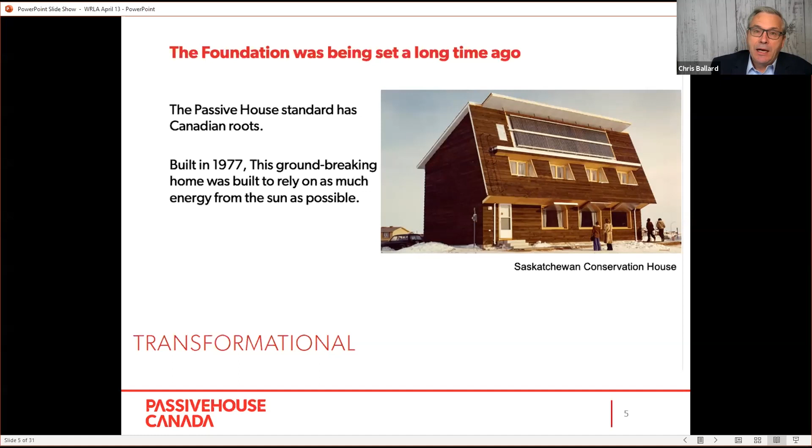Still has a family living in it, still performing to the standard it was designed to. Europeans came along and looked at this house and a number of others in cold climates and said there's a lot to learn. They took the data home, the design and ideas behind it back to Europe, they codified it, and today we have the Passive House Institute building standard, recognized globally as the best way to high performance or net zero buildings.

So we're called Passive House, but we are more than houses. We are a commercial space, institutional space, as well as houses.

Mark, have we got the slides back? If you're not seeing them, maybe Jess could chime in. Is it just Chris that's not seeing the slides? I believe it's just Chris. Okay, good. That's not my fault then. No, it's my fault. Give me one second here. Well, everybody that works in construction knows one of the first things you learn as an apprentice is to have a scapegoat. As long as we've figured that out, we're good. Can we scapegoat the technology? Look at that. Sure, it really isn't - I can't see it, I'll start and stop it again, and it might pop up on your screen again. That would be great, because it was there for the longest time.

There we are, there's our mission. Our mission has three things we focus on. We're here to make zero emission buildings known and adopted by government, industry, and the public. We support government and industry in the transition to high performance, zero emission buildings. And finally, we're advocates for the Passive House Institute building standard because it is globally recognized as the best and fastest way to get to near zero when it comes to building standards.

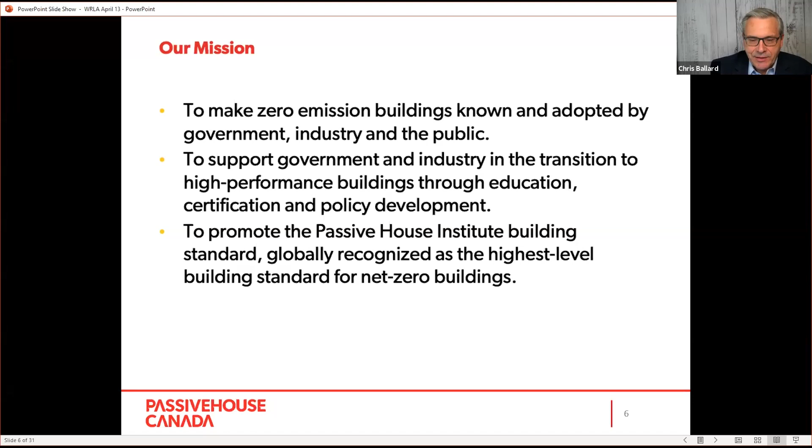So I'm at a bit of a disadvantage, Mark, in that I can't see the slide, so I'm not sure what's up next. And it's back again - I'm just closing down absolutely everything on my desktop to make sure that you're the only thing that's here.

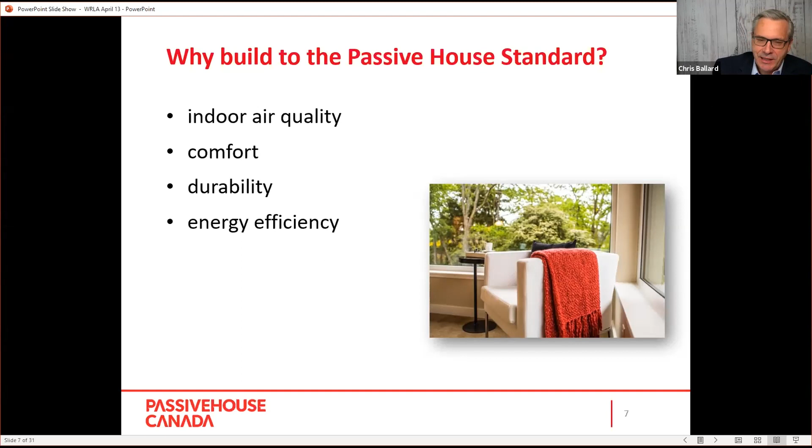So why build to the Passive House standard? Well, there's a number of reasons. First of all, passive buildings have exceptionally good air quality - Mark will get into this a bit later. They're very comfortable places to live in and work in, with really good thermal warmth and durability. There's a quality assurance that comes with building to Passive House standard - in order to be certified, you have to meet a very high standard. And of course, they are super energy efficient - designers often say it takes you and your dog to heat your house, and that's about it. On top of mind for many of us these days is GHG reductions - if you're not burning fossil fuels to heat your house, you're helping with GHG reductions. And overall, there's quite a cost savings when you move to a Passive House style of building.

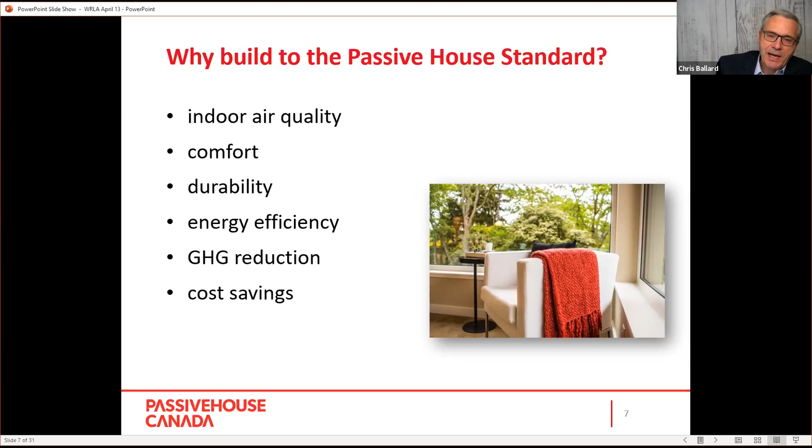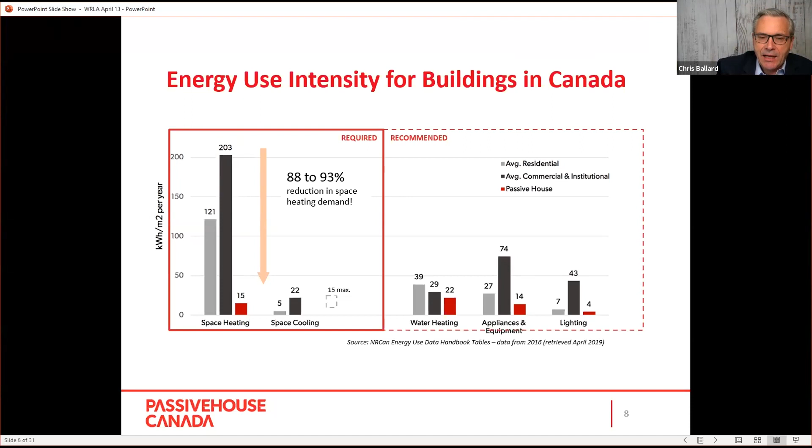So next, why are we doing this? The big focus these days is on energy efficiency. Here's a simple chart from the federal government through NRCan about energy use intensity for buildings in Canada. If you look at the red square that has 15, you're looking at about an 88 to 93% reduction in space heating demand when you move from code built buildings to a Passive House style building. Our country and countries around the world are going toward reducing energy consumption, and getting down close to that 15 is more attainable using the Passive House style of building than continuing with current code. So we know where we're going, and we know where the world is going.

Passive House is perhaps the easiest way to get us all there.

Going back many years, every province and territory in Canada signed on to the Pan-Canadian Framework on Clean Growth and Climate Change. That's literally every province and territory, and it's a roadmap to zero emission buildings. By 2050, every building in Canada will be zero emission, and in essence they'll be passive houses by then. We need to make new buildings more energy efficient, and we're adopting increasingly stringent model building codes, adopting that net zero energy ready model by 2030. So by 2050 it will be in place, but by 2030 we'll have that model.

Some provinces even sooner. So the federal government and all the provinces and territories are working on a harmonized national building standard. This is the proposed national code that will guide everyone to net zero ready by 2030 and net zero by 2050. Seems like a long way away, but it's really not. It's just around the corner. We have to get ready to get there.

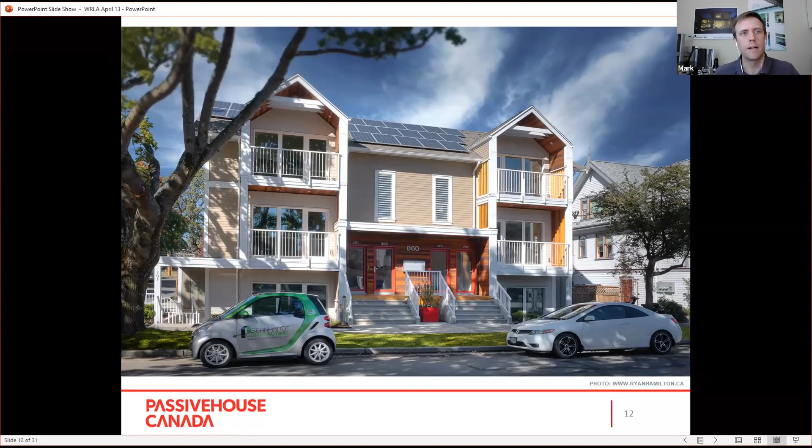Inside, it's the same thing. We're not compromising finish, we're not compromising design, all sorts of things like that. Inside, it looks like a regular house. For most people that walk into a house like this, I spend much more time talking about the paint colors than I do the insulation in the walls, which actually kind of annoys me. And that's why I spend most of my time helping other builders build passive house, so they can talk about paint colors and I can talk about insulation and things like that.

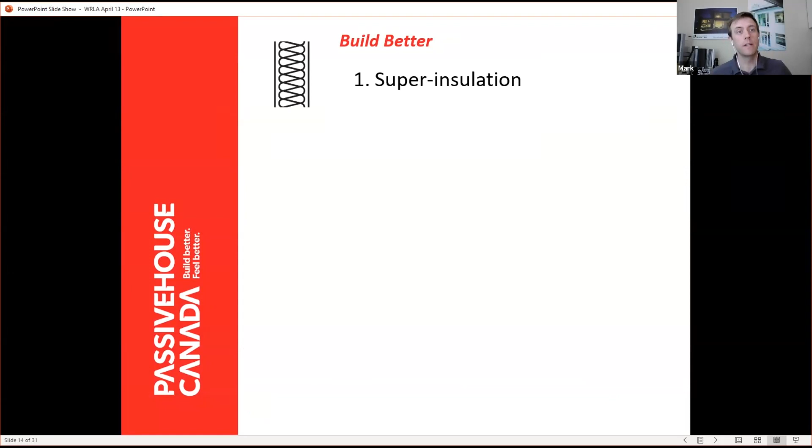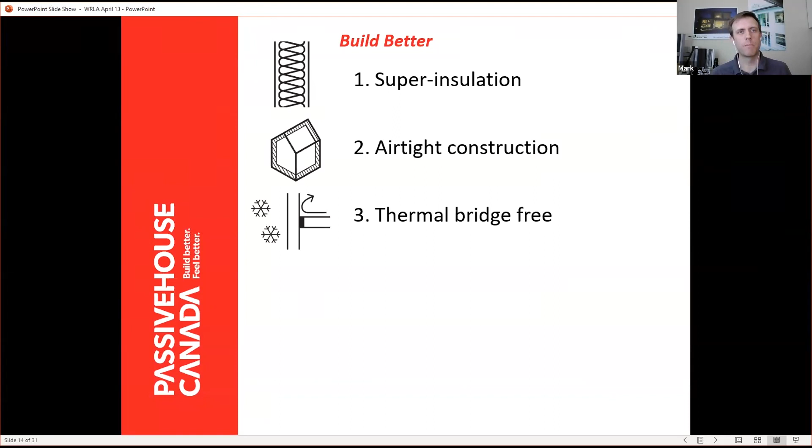So when we talk about build better, what do we mean? We mean super insulation, usually a significant amount more than what we'd traditionally see in a code-built house. We talk about airtight construction - if you're leaking air, you're also leaking heat and moisture through your envelope, so that's a potential durability issue. We're talking about thermal bridge free - traditional construction quite often will have steel beams coming through the insulated envelope, which creates a space where mold can grow, in places we generally find that undesirable. We're using higher quality windows and doors.

Quite often these would be triple pane, with different coatings depending on the situation. And we're not necessarily orienting all the windows to the south - in fact, in a lot of our projects we're not doing that. We're doing maybe even sometimes the opposite. What we're doing is taking advantage of the sun where we need it, using nature with what it provides rather than trying to fight nature with air conditioning and things like that.

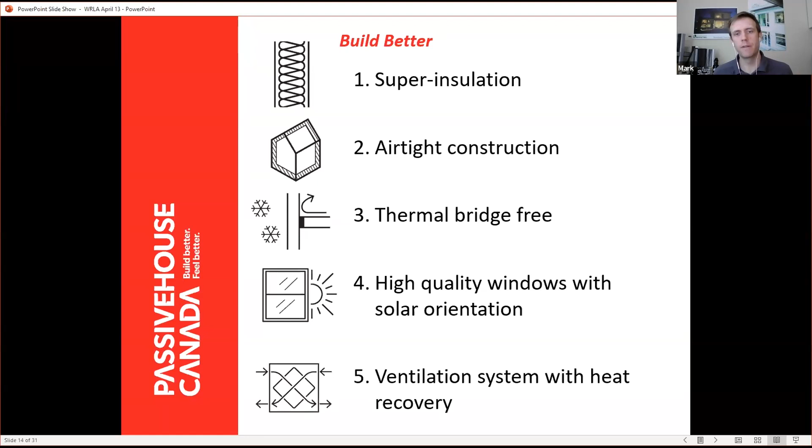And we're having a very good ventilation strategy. When we airtight a building, we need to get fresh air into that building somehow, but we want that to be managed and controlled, and we don't want to waste energy while doing it. So a very good ventilation system, which also provides very good filtered air inside. And that results in these kind of side benefits a lot of times.

We talk about energy efficiency all the time, and as energy nerds and engineering types, we'll often focus on the energy. But the real benefits, I think, are this feeling better. When I talk to a client about one of these houses, I talk about feeling better. I talk about my quality of life. I talk about how I'm not in energy poverty, and things like that. I don't necessarily talk about my energy bills.

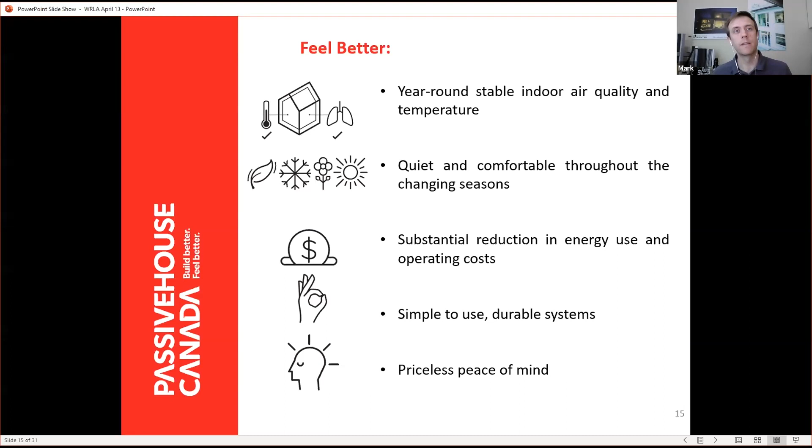And that was actually a lesson we learned early on in the marketing of this - that very few of our clients actually cared what their energy bills were. It's about that quality of life and that health and comfort that comes as a byproduct of chasing that energy efficiency.

So what it is in technical terms, the Passive House Institute, the one based in Darmstadt, defines Passive House with a few different things. The simplistic definition is that it cannot use more than 15 kilowatt hours of heat per meter squared. If you're looking at some codes and standards, you'll see similar numbers, though Passive House is measured a bit more strictly, so they're not quite equivalent. The idea is this is how hard your furnace has to work to keep the house warm, and that puts a limit on it.

When we put that strict limit on it, it forces us to look at other options for heating and keeping the heat, or the very limited amount of heat, that we already have.

The primary energy is another way of saying source energy. You might have heard that before, where this is the energy generated at the power generation station, plus all the transmission losses to your house. They calculate all of the energy that this house actually uses for its operation, and that, again, is pretty strict.

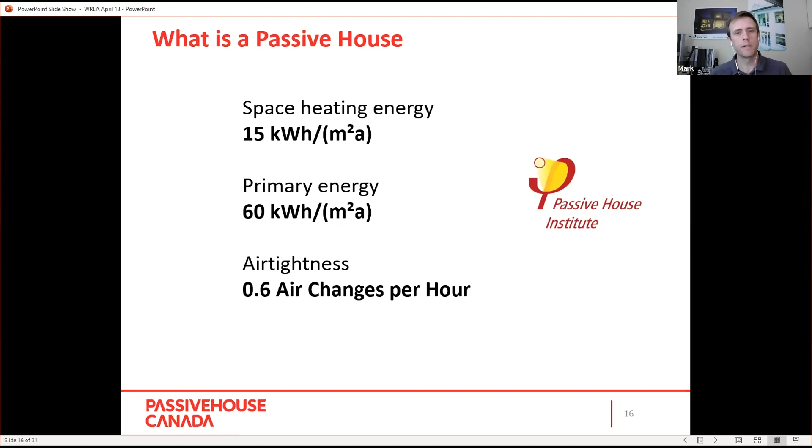That'll drive us to look for efficient technologies, a lot of things like our heating systems, probably driving towards heat pumps and things like that. And then, of course, the air tightness - that'll be the critical one. The limit for Passive House is 0.6. Now, that does sound ambitious, but with a little bit of practice and training, that is quite achievable for most qualified builders.

So what does this mean for suppliers? I know a lot of folks on the call are suppliers of building materials, so it's important to discuss what that means for you guys at the contractor desk at your local supplier store. For me, when I'm shopping for supplies for our next project, we're going to use a lot of insulation. Obviously this is going to be a pretty thick insulated wall, so that's what we're going to be buying a lot of.

We're also going to be a bit picky about a few things, like air tightness and thermal bridging. We're going to be looking for products that allow us to do air tightness very well, and products that don't require steel brackets and things like that to go through our insulation layer. Our build schedules might also be a little different - quite often we will insulate the outside of the building and leave the inside, so our trades might come in a different order than what you're traditionally seeing.

There are a hundred different ways a passive house can be built, and built very well. There's some examples of walls at the bottom - I think we've tried all of these plus another dozen others. We're looking to find the best one, and I'll get back to you when I find it. I've been doing this for a decade and still haven't - we're still fine tuning, but there's a lot of different options. There's no set way, you don't have to use a particular material or do it any which way. It's kind of the beauty of the flexibility of it.

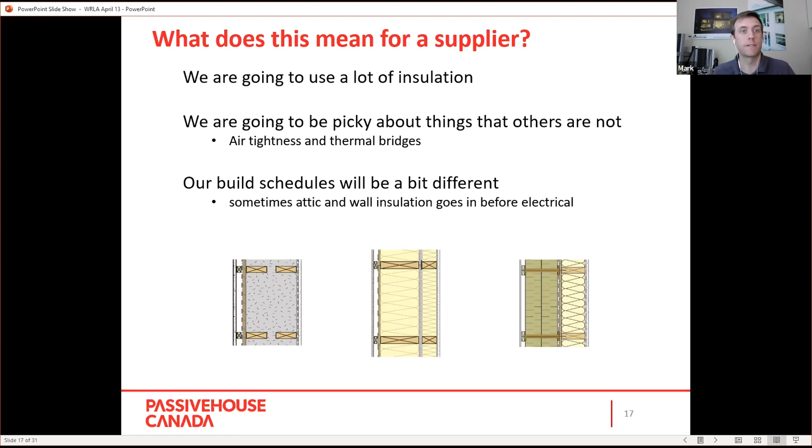In terms of what suppliers need to have on their shelf - when I first started building the house I'm in now, which is almost a full decade old, we had to special order all kinds of things. I'm really happy to say we don't have to do that anymore. Our local suppliers here on Vancouver Island actually have almost all of the materials we need to construct a passive house today on the shelf already, and that would be true across the country.

Most of the materials we have already are passive house suitable - we don't need certified little bits here and there. Some certified products make it easier, like windows and doors, to get our certifications. But the general supplies, the nails are the nails, the 2x4s are still 2x4s, although they do cost a lot more today - those are all the same. What we might want to look for are things like better air sealing products.

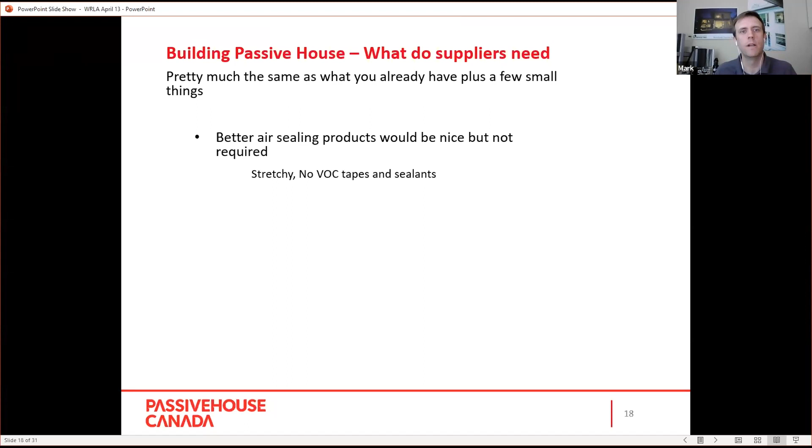You can build a passive house with Tyvek and duct tape if you want to. That is possible, but I'd argue it's a little more difficult, because those materials aren't as flexible as we'd like. Things I like to see in an air sealing product are something that's stretchy—buildings move, and I want the tape and sealants to move with them.

I want no-VOC tapes and sealants, because when the VOCs come out of that material it gets brittle, and I want a long-term durable product. I'm also looking for higher performance windows. There are a lot of Canadian manufacturers making passive house certified high performance windows. In fact, in some of our far northern projects, they've been using these windows for quite a long time—they're not even new to the market, just newly marketed as high performance. So at our local lumber stores, we're looking for those higher performance windows, maybe not in stock, but available, with salespeople on the floor understanding they're available and what the options are.

Also looking for higher performance ventilation systems. Right now, as far as I know, there isn't a lot of selection for really high performance HRVs. We sort of max out around 75% efficient, and I want to see them up above that, in the 80+ range. Right now there aren't any North American manufacturers making them in that range, but they're easy enough to get from other places—there are suppliers that carry them around here. Those are the sorts of things we'll be looking for in the future, and I think there's still room for innovation from our suppliers there.

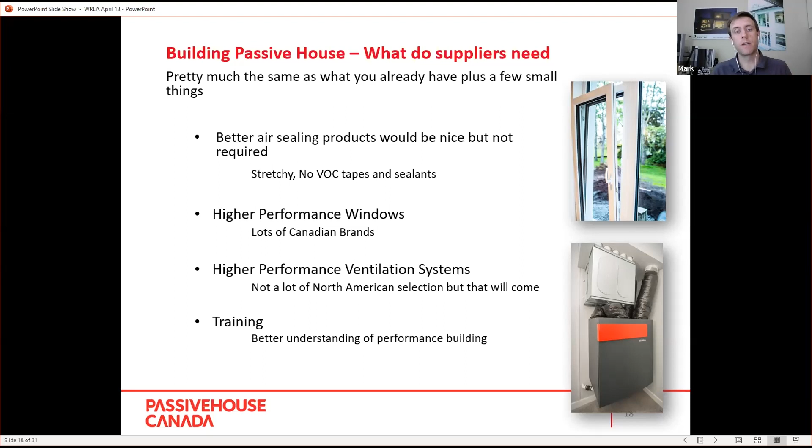The last thing I'd like our local suppliers to have is a bit of training. When I first walked into some of the hardware stores here and said I wanted to build a really thick wall, I got the cross-eyed look—thinking I was crazy, that it wasn't worth it. That's a really outdated attitude. I don't need suppliers to know the underlying physics of how the wall works, but understanding why I might be doing this, what materials might work, so when I ask for something they can say 'here's three other things that might do the job, and we've got them on the shelf.' That basic understanding means we're at least speaking the same language about the same broad concepts.

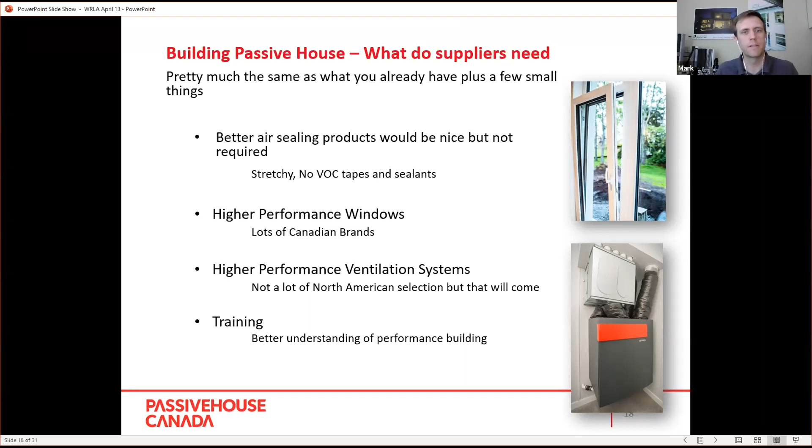That leads me to selling high performance housing—whether there's a market for this, and whether we'll see it long term. This has been a bit unique in my experience across the country. For a number of years I was the only one who had actually sold a passive house in North America, though a few more have sold since. That's changed now, and it will change in rather dramatic fashion as some pretty big projects come online. It's something we've been very successful at doing.

This sort of buzz that is created by very high performance buildings still exists and can still be captured, and it makes it very easy to market and sell these buildings. They very much do sell themselves, and they stand out from the competition. I want to give an example of how that works.

So the North Park Passive House, this sixplex I've shown a few times here, we built a number of years ago now, before the market was really hot. It was actually the end of 2012, and things weren't down in the dumps, but they weren't this blazing hot the way they are now. When we went for sale on this one, it officially spent 15 days on the market for all 6 units.

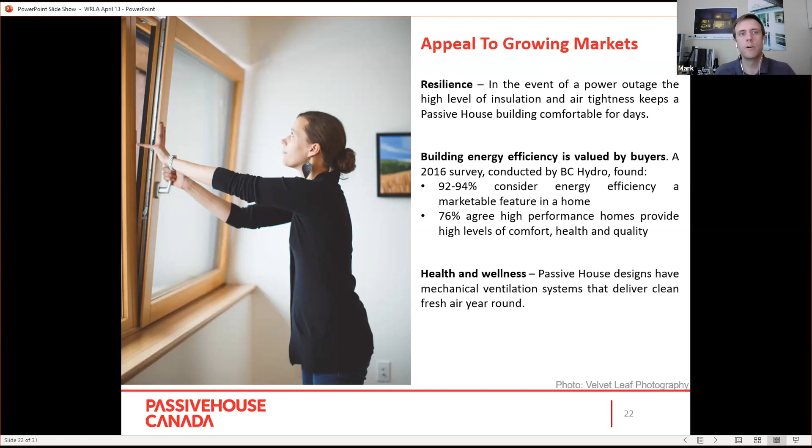There's also a growing realization that higher performance homes are more resilient, that they will survive disaster better. If the power goes out, it's not a big deal if you lose your heating for a few days - you can survive that, it might be a little uncomfortable, but it's not the end of the world. And then there's health and wellness as well - the better air filtration, all these different things contribute to the health and wellness of the house, and these homes really do deliver quite a substantially different product in that regard. COVID times really bring that home.

So I'm going to pass it back to Chris to look to the future.

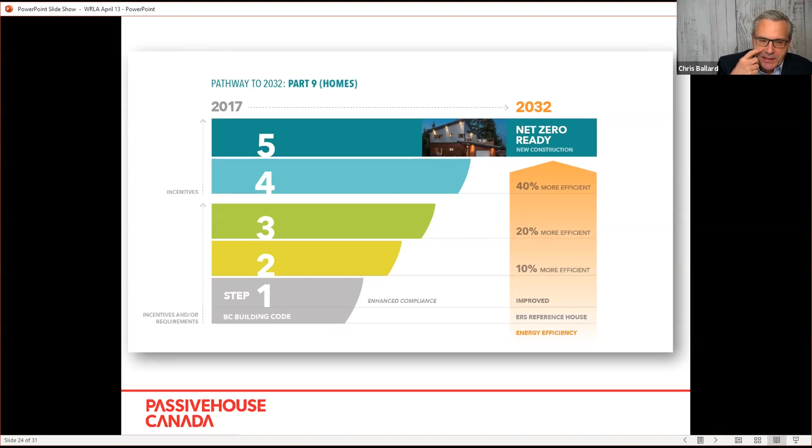A couple of great examples here. One is BC, here is their step code. Step 5 is to be net zero ready by 2032. BC has really led the way across the country, but we also see in Ontario, perhaps the largest housing market in the country, 2030 net zero energy planning to be net zero energy ready, all part of the National Harmonized Building Code that will be released shortly.

So this is not a trend, this is the way of the future. The net zero home, the net zero building, is here to stay. I know your customers will be wandering into your stores wanting to talk about net zero, perhaps even Passive House. We're here to help you get ready for those customer inquiries, or if you've got your contractors and trades talking about this, we're here to help you and them as we transition to net zero building.

And Mark, I've lost you. Darn it, yeah, I know, it's really strange. We're gonna blame the internet, that's the scapegoat today, let's blame Facebook.

I'll give you a couple of examples happening in more and more municipalities across the country. Here's a couple of big ones. Toronto, in 2017, voted to declare a climate emergency, as many communities across the country have done, and to target greenhouse gas emissions. One outcome of this is the Toronto Green Standard, a very ambitious building standard that is seeking net zero.

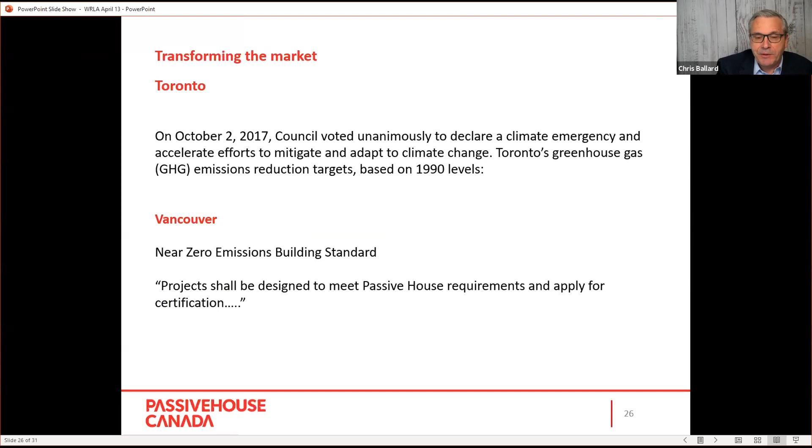As I said earlier, Passive House Canada exists to help business as the marketplace transitions to these high performance near zero, net zero buildings. We provide all types of training. Our website, shown on the last slide, has all of the information for you.

But I'll give you a hint at some of the things you may be interested in. We have an online self-paced training for a basic understanding of what a passive house building is. It's a great introductory course.

We have some upcoming courses. If you're interested in learning about embodied carbon - Passive House, to go back a step, really looks primarily at operational carbon, what it takes to heat and condition the air in a building. That's operational carbon. But more and more people want to know about embodied carbon, so you'll hear that term more and more. We're offering a course about identifying and reducing that in buildings, because once operational carbon is driven down to zero, the next carbon on the horizon will be embodied carbon - the carbon footprint it took to create the building. We need to minimize that as much as possible.

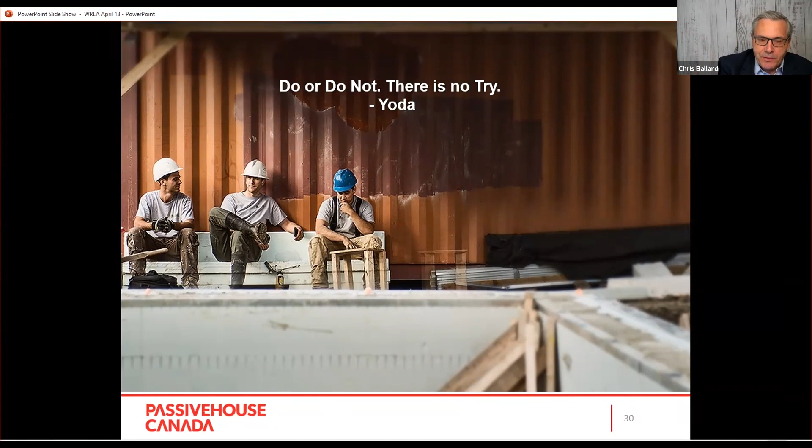Perfect, and that information is in the chat too. Yeah, those trade courses I think are really key, and that's something we hire from as well. Our local college is also partnered with Passive House Canada and is looking to offer that training, so we'll certainly be looking to hire from those courses, and it'll be great to see those skills roll out a bit more mainstream.

Yeah, great. And we end with a quote from Yoda.

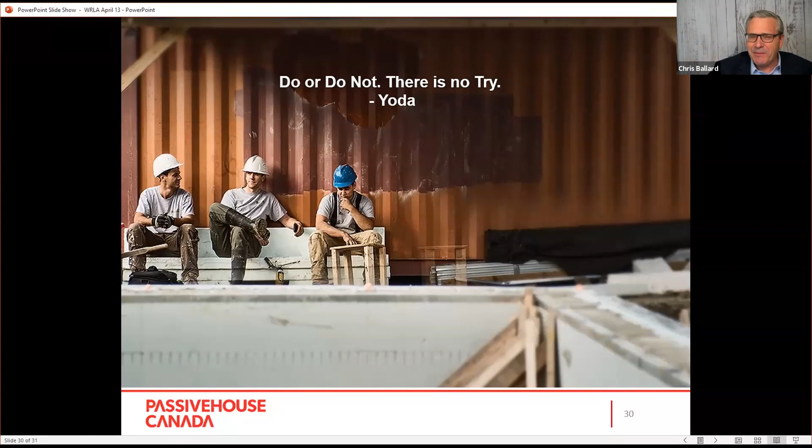And what Passive House Canada is here to do is to help businesses get ready for the legislative change that is coming. But before even legislative change comes in, what we're finding is just general awareness. I've been with Passive House for about 13, 14 months now, and we track all of the hits to our website. And it used to be, we'll say 60% were from BC because that's where the action was. But just in the past year and a half alone, that's really changed, to reflect interest from other parts of the country. So instead of being 60% of the hits, BC is now worth about 30, 40% of the hits. Same number, actually increasing numbers even in BC, but the rest of Canada has really grown from coast to coast to coast. People are hearing about this Passive House thing, they're wanting to learn more, and we're here to help business get ready.